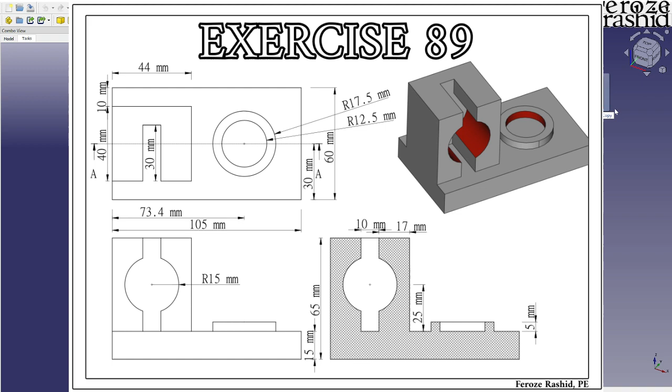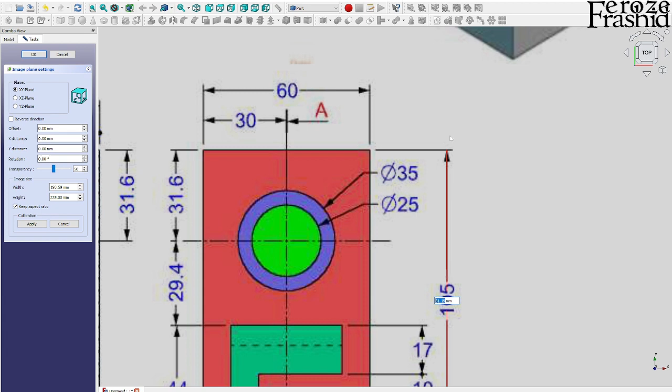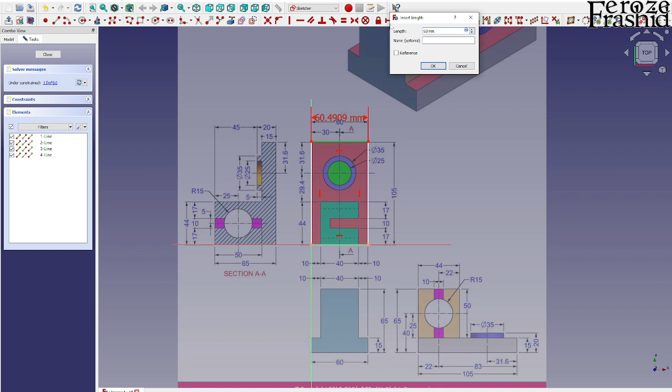So on this one, this is a pretty simple model. We will leave that on the XY plane and then adjust the axis cross at one of the corners of the rectangular area. Alright, let's take the axis cross out of our way. My first thing is to draw, let's go ahead and change the workbench to Part Design. Create a body and then create a sketch on the XY plane. On XY plane, I want to build this rectangular area which is 60 millimeter in width and 105 millimeter in length.

The first thing is to actually build a pad which will be 15 millimeter thick. So pad of 15 millimeter on that sketch, and let's go ahead and change the pad name to base.

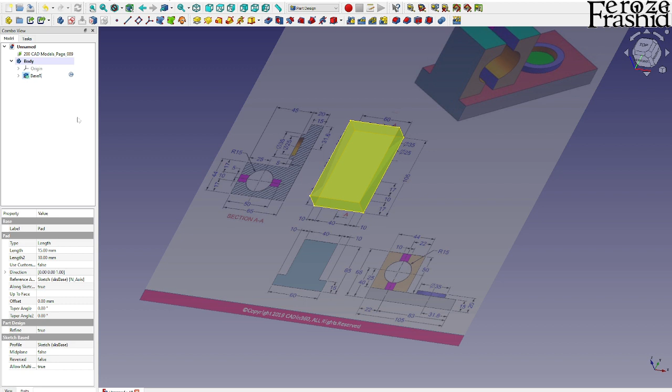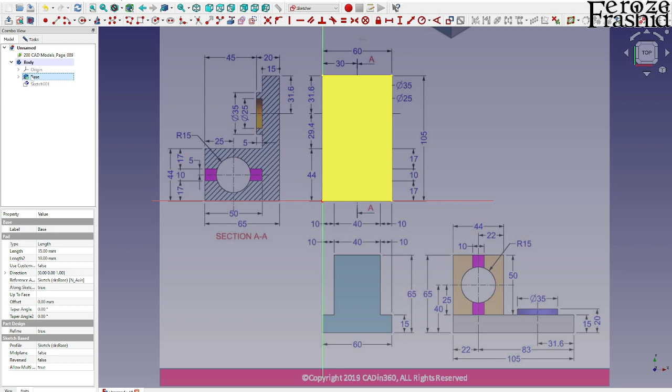On that, we want to build this circular area, this circular collar so to speak, and that will sit 5 millimeter above this pad. Let's go ahead and build that. It will be on the XY plane as well. I'm going to hide this base for a minute. The center of the circular area is 44 plus 29.4 millimeter above the center and 30 millimeter on the right side of the center.

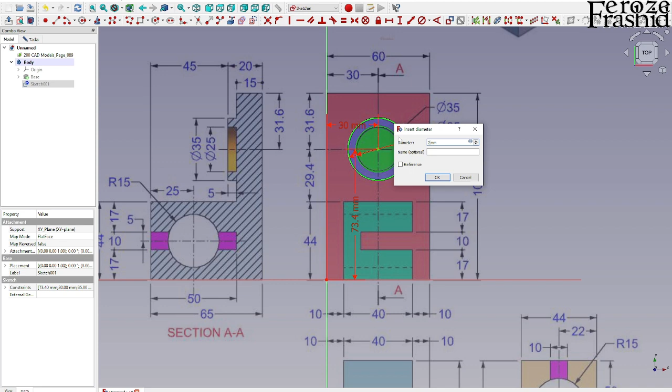Let's go ahead and apply some constraints. The outside is 35 millimeter diameter and inside is 25. Right, it's a fully constrained sketch and I want to rename that as sketch collar.

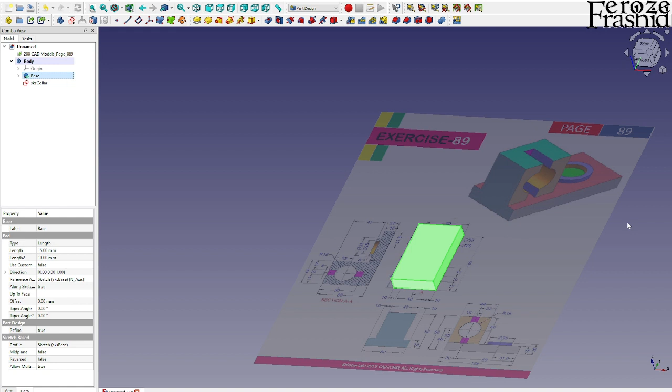So here's the base and our sketch is sitting at the bottom. Now at this moment I can do one of two things. I can bring the sketch above, or I can pull the extrusion above the base. So second thing first, I can pull the extrusion. It was 15 millimeter, I can make it 20 and it comes up. So that's one way to do it.

Or I can take this collar sketch, and on the Z direction I can make it 15, so that comes up, and then I can make a pad for 5 millimeter. So these are the two things. The first thing I will not do.

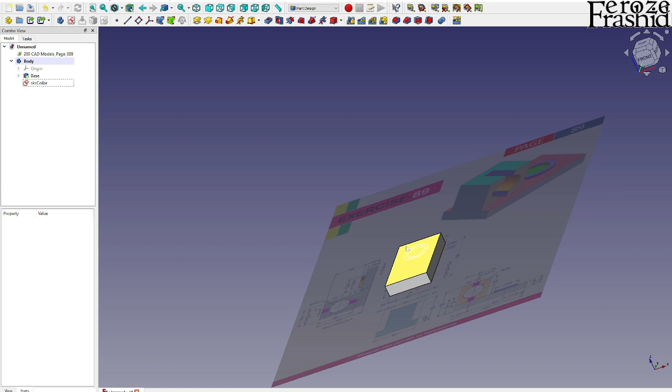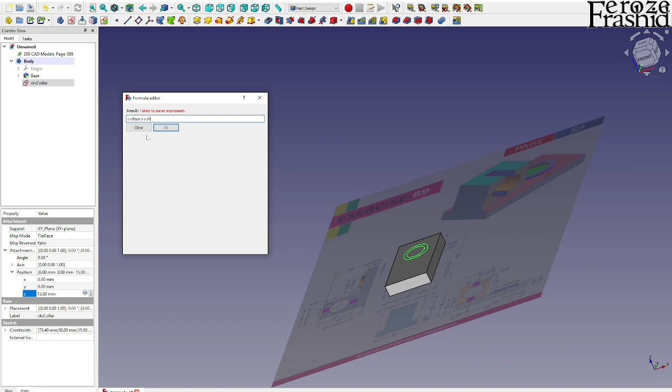I will do the one where I place the sketch on top of this face, but on this one, this 15 millimeter, I want to formula it with this base property. That 15 comes from the base height. So let's go ahead and say base, dot, and it was - I'm going to say height. What is length? Yes, I think they call it length, 15 millimeter. You can see on the base the length is 15 millimeter. So that's what we hooked in with the Z direction. That way if we come back to make it 20, the sketch on top will also move with the changed parameter.

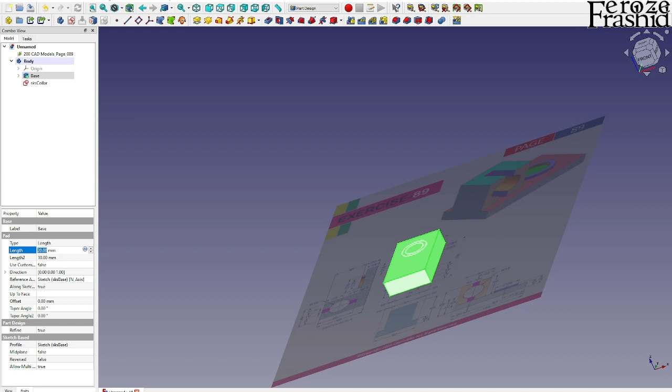After that I will make a 5 millimeter pad out of it. So that's what's called best practices in FreeCAD to avoid some issues, for example topological naming issues.

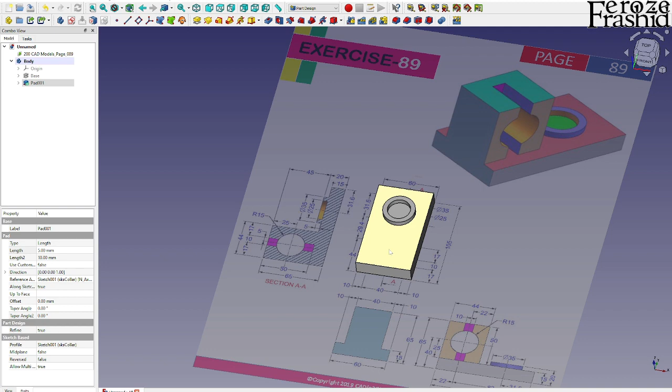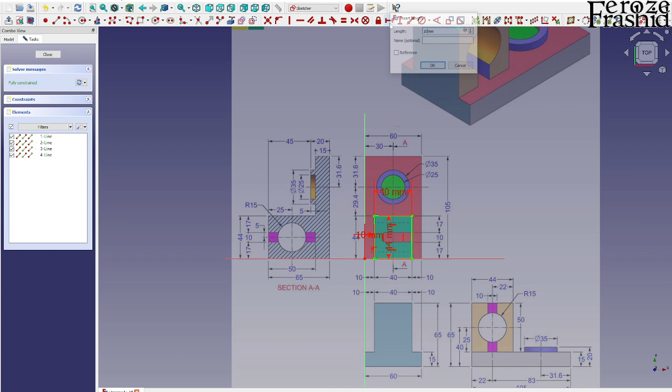Alright, let's move on to the next phase. This is a cubical area, 44 millimeter in length and 40 millimeter in width, and I want to build that on this face as well, in the same manner that I did this one. So what I want to do is build a sketch on the XY plane, and then draw the sketch first. This will be 40 millimeter in width and 44 millimeter in height, which is 10 millimeter away from the center on the right side. Okay, we got that. Now I want to rename that to sketch cube.

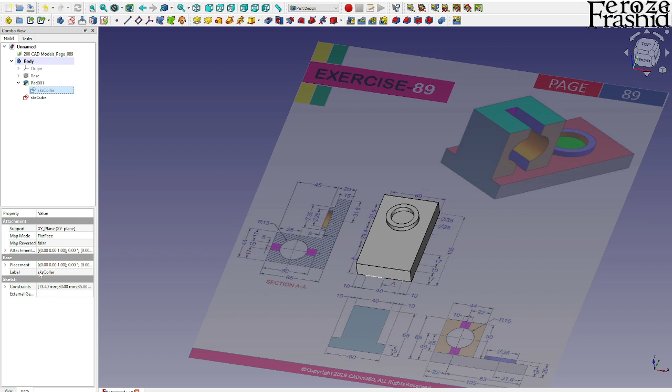And pull that up - nope, we want to adjust the parameter here, attachment, to make it go up. It will be the same formula as with this one. So I'm going to go ahead and take that formula from the previous sketch, come back here, and paste it in there. Okay, now I can make a pad of 50 millimeter.

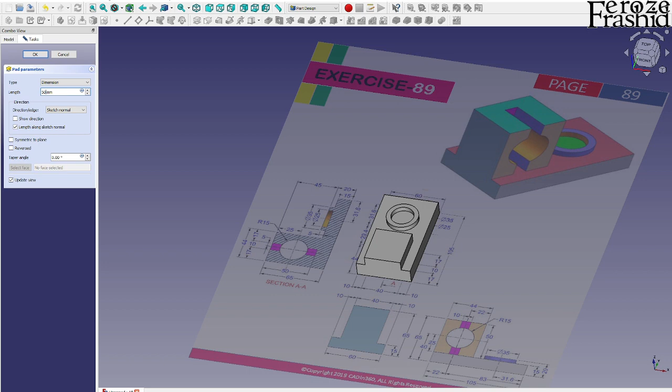All right, now let's work on this hollow part. I'm going to say this is 30, and this is 40 millimeter, and this is 10. So 30 millimeter - we will have to build a hollow part that goes deep inside for 30 millimeter.

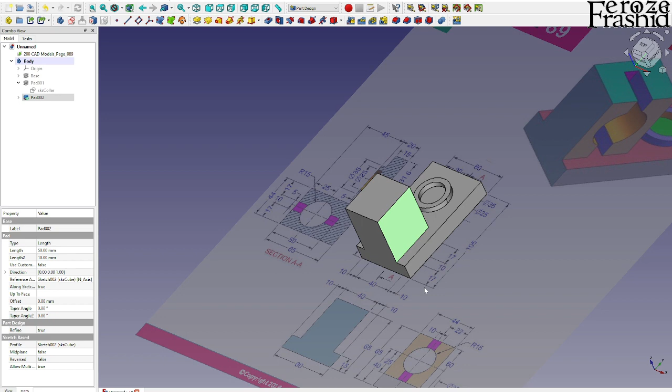We can do that from this face, but again, I don't want to map the sketch on this face. If I select this and then draw a sketch, it will be mapping that face, and we don't want to do that to avoid a topological naming issue. What I want to do is draw that sketch on the YZ plane and then pull it in this way.

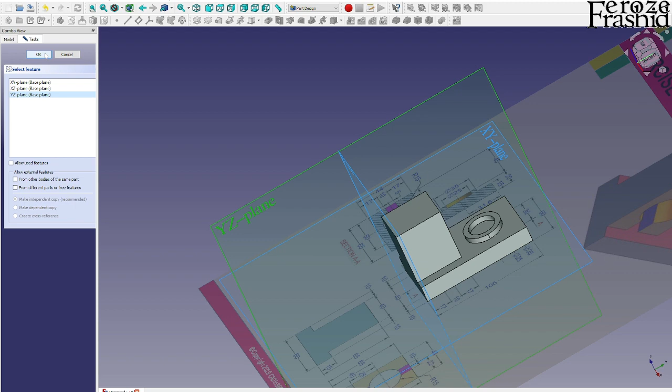So let's go ahead and make a sketch on YZ. There, YZ, that's the face. These XYZ are the local coordinates, whereas this YZ is the global coordinate from here. I know it's a little complex, but bear with me on this one.

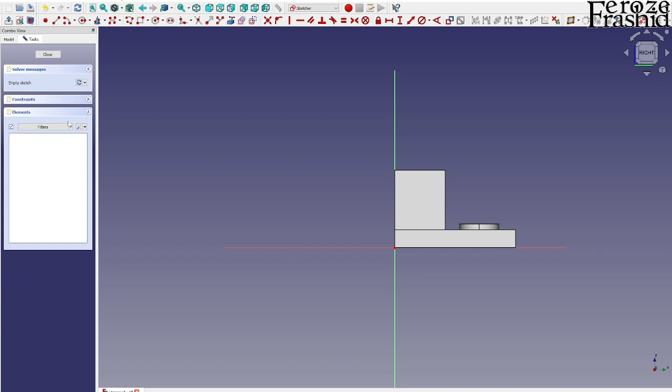So if I change this Z direction, it will move the sketch from its face up and down. Let's say 20 - there is nothing on the sketch, but the sketch is moving this way because, on its flat, this is Y, this is X, and this is the Z direction on the local coordinate.

What I want to do is bring it up all the way to here, which is - remember, this is 40 and this is 10, so we'll have to make it 50, right? And that's where the sketch lies.

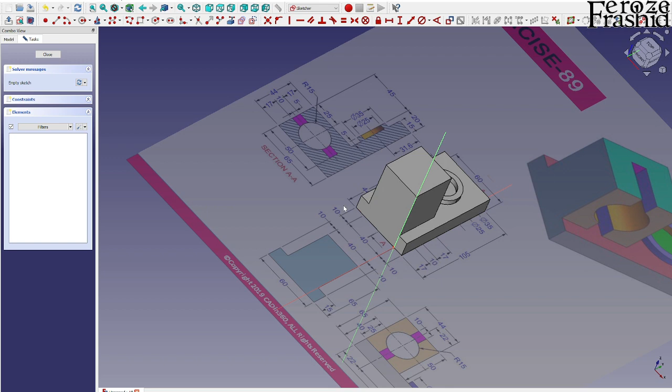But as I said a minute ago, I don't want to put a solid number in there. I want to make it a formula. And to make a formula, this 50 actually is part of two numbers - this is 40 plus 10. So 40 is the length of this body, and 10 is the length offset.

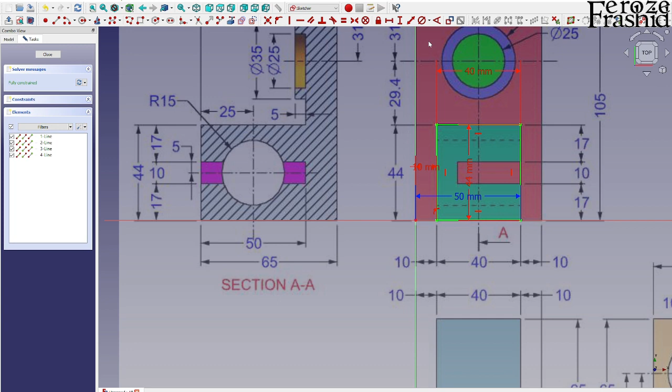So we can make it simpler by going to the previous sketch and actually defining this distance, this 50, as one parameter. Let's take these two points and make a dimension. Now that would put it as a redundant constraint, so let's go ahead and make it a reference and name it - I'm going to say reference for cube. Okay, so we got that as one parameter.

So this 50 millimeter is actually a reference - it has a different color on it. Now I can come here and make a formula, pulling that from this specific sketch, cube. So let's say sketch cube dot, and then constraint, because it's one of the constraints, and then reference for cube. So that way it's in there now.

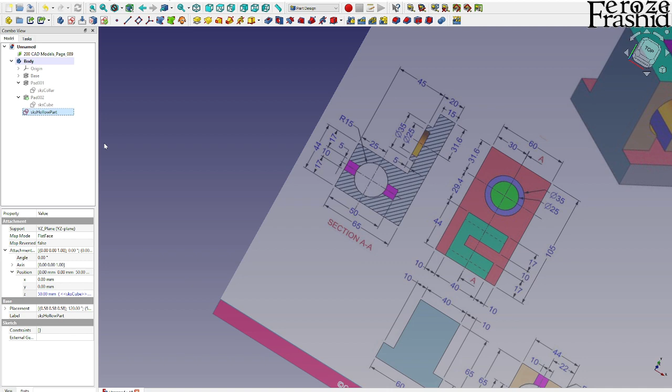Okay, let's start building the model. On this face, I want to build a rectangular area in the middle and a 15 millimeter radius hole in the middle.

So an easy way to do it is to pull in a couple of geometries from there and then draw a rectangle in the middle, and place this along this line.

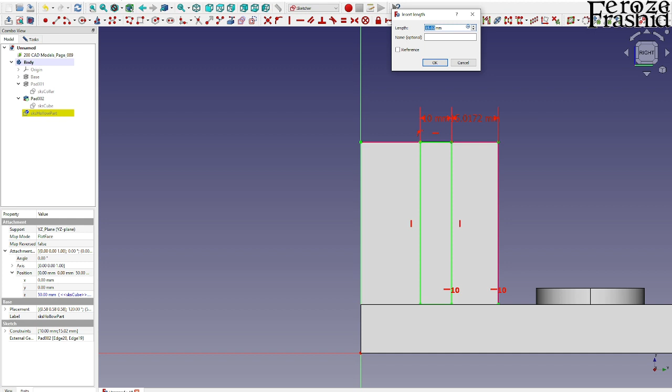Okay, so it was 44, and this is 10, so we have 34 left, so it would be 34 divided by 2 - that puts it in the middle. And then there is another circle in the middle, which is radius 15. This center would be halfway through this 50, so that's 25, and this would be halfway on this side, which would be 44 divided by 2.

Now these two will have to trim some things away. So let's go ahead and trim this line, this line, this, and that.

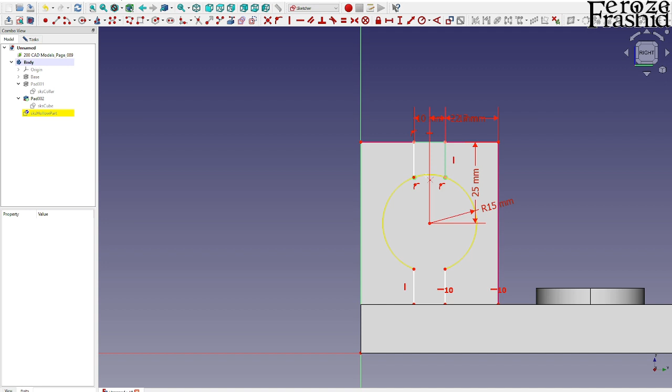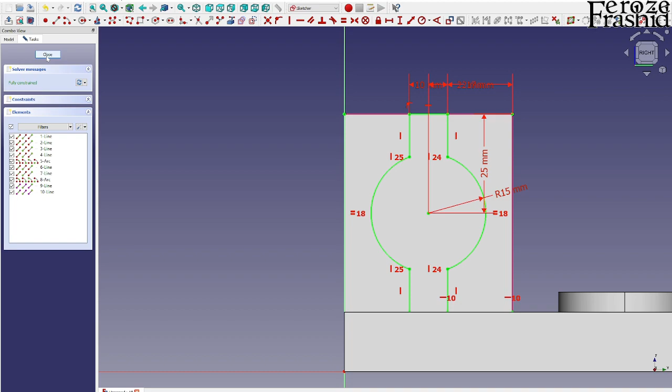Okay, so the vertical plane went away, so let's take care of that. I don't see a vertical constraint in here either - I wish they retained these two vertical and also placed them in the same vertical plane. I really wish after this trimming this constraint would be there - something for FreeCAD to work with later on in the next update maybe.

But anyway, so we have our hollow part and we can push it down. We decided that to be 30, so let's make a pocket for 30 there. Very simple, and that is our object.